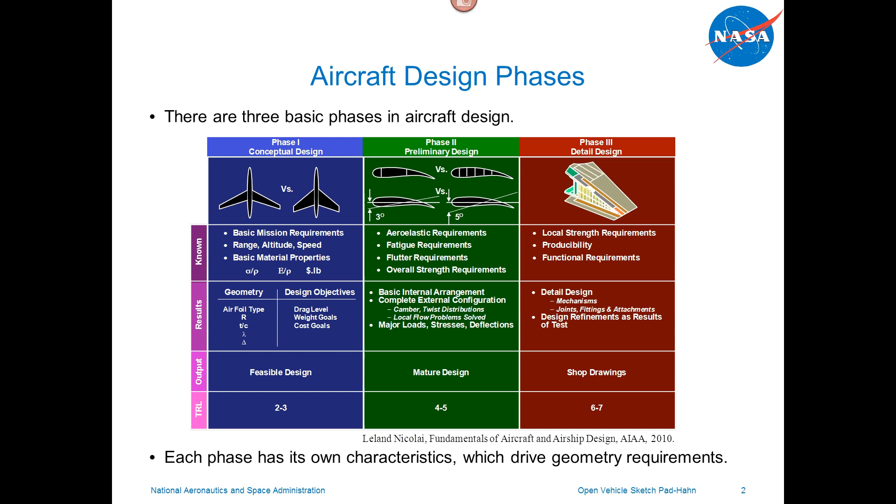But really, the whole mindset with this effort is we don't want to burden the front-end conceptual exploration with what the back end needs. They're very different needs between the front and back end, and I'll describe this with an analogy—sculpting. Imagine if you had this big block of marble and you got out your finest pick to start working. It would take you forever to get down to your statue.

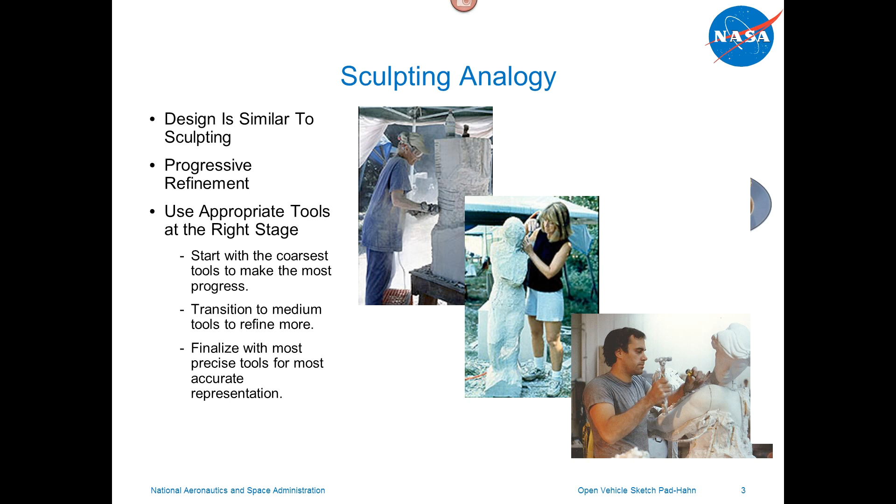So you start with a big sledgehammer and power saw, and you whack away the big pieces. Then you go to a slightly finer grade of chisel, but still taking away big chunks of that marble until you really got it honed in and you know what it basically has to be. Then you can use your really fine tools to pretty it up and finalize it. Design is exactly the same way—you want to use the right tool at the right time to do the right work.

So when we talk about geometry, you've got to realize our objective is to analyze these concepts—to figure out how well they're going to work compared to everything else that's out there. It's really important to understand that geometry is the core and starting place for all analysis. It's interesting—if you think about geometry, everything is an approximation of reality.

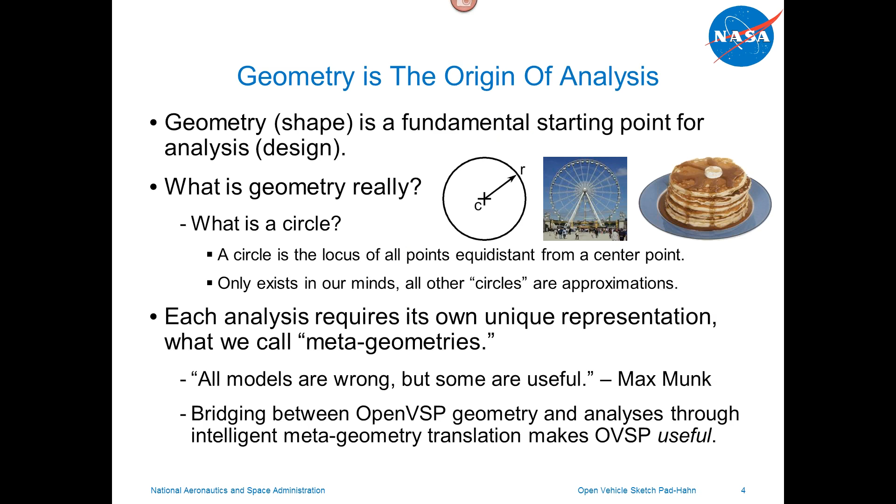If you look at those three different approximations of a circle, they're different approximations, for different purposes. That gets to a really important point when you start talking about geometric modeling: what you want for one analysis is not necessarily what you want for another analysis. So what we have is this common ability to create a three-dimensional shape and then export all sorts of different meta-geometries. Let me show you some examples of that.

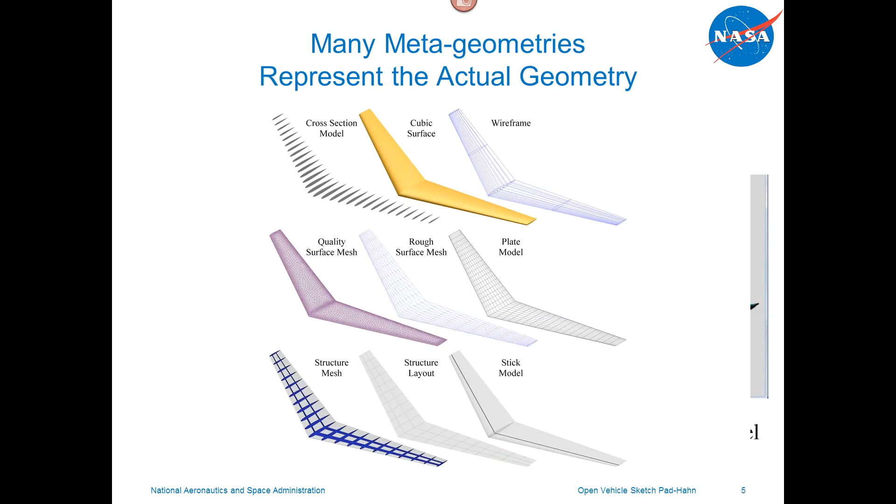For instance, when you're essentially rendering a 3D sketch of your vehicle, it's very useful to just look at it in a wireframe. If you're going to send that to a vortex lattice method, then you want a flat plate model. If you're going to export that to Star-CCM or any one of the other CFD codes—whatever your favorite code is—then you're going to want a quality surface mesh. If you're going to do finite element analysis, then you're going to want a structural mesh. So even though you have this common basic 3D model, this watertight model, you really want the capability to export many different versions of that geometry—different meta models that represent what you're trying to analyze. That's very important when it comes to VSP.

Rob at Cal Poly have been doing an incredible job over the last couple of years taking our initial parametric geometry core modeler and creating what they call degenerate geometry models. On the left-hand side you can see a three-dimensional model that you would create in OpenVSP—specifically a Cirrus SR22 that I modeled up. But when you want to analyze that in a rapid, flat-plate vortex lattice method, what you really want that analysis method to see is not that wireframe on the left, but the degenerate flat plate model on the right.

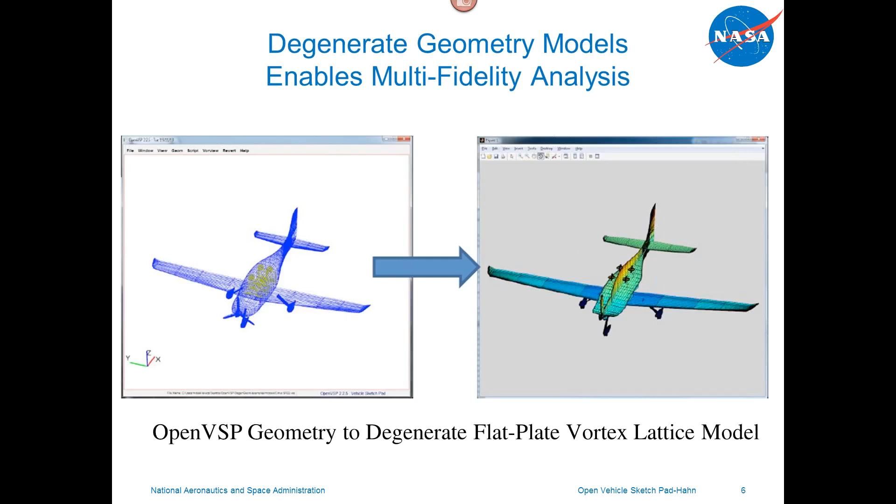They're very, very different geometry representations of the same core vehicle. This is a very important capability that Rob has been working really hard to implement in this latest version—not just a flat plate degenerate model, but all sorts of different degenerate models depending on where you're trying to send this geometry in terms of analysis. So again, getting back to this comparison of why you might choose to use OpenVSP.

I've been working at NASA for 30 years. When I first started working at NASA, we input all geometry as text.

You really had no idea what you were modeling, but you had different parametric inputs for span, chord, and you ran it through the analysis and hoped you got everything right, because you weren't even visualizing the geometry. As PCs became more powerful, there was a quick trend to go to computer-aided design.

That originated for manufacturing purposes, so it's incredibly good at being able to create a solid model of any shape. Well, the fact is, for conceptual design, we really don't need to create any shape. Basically, we need to be able to create round things and flat things and put them together in different combinations.

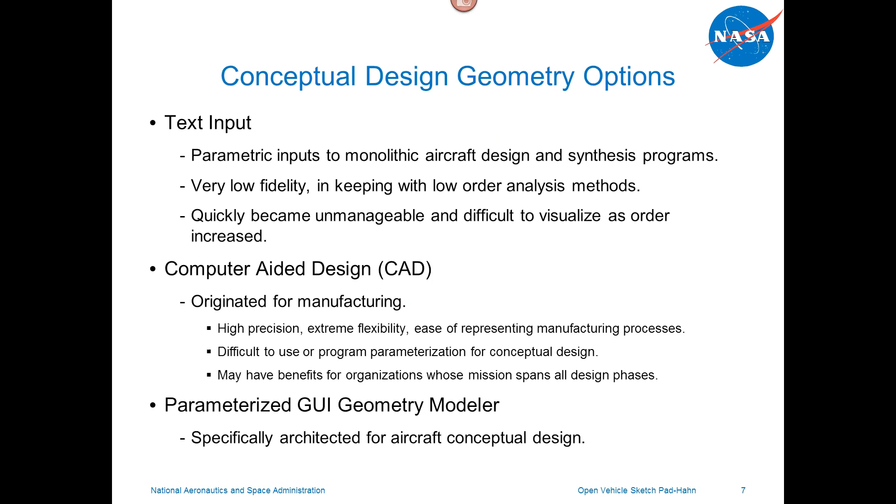So we wanted to find this sweet spot where we could give up some of the complexity that CAD inherently creates by being able to model anything, but instead have this ease of use and rapidity in putting together these 3D models parametrically the way that we used to do it in text, but be able to represent that geometry visually and see what we're getting. So I'm on slide 8 now, where you actually see what you'd see if you opened up OpenVSP.

This is a model of the Bell Eagle Eye, which is a UAV tilt rotor. You can see that we have it in wireframe mode, and you can see the internal packaging and the outer mold lines. In the geometry browser, just to the right of the visualization window, you can see that it's made up of all these different components.

Looking at the wing component, it's made up of essentially different parametric inputs. So instead of defining that wing as you would in CAD with a whole bunch of points or essentially extruding an airfoil shape, you just input the span, the tip chord, the root chord.

You can have different driver groups depending on whether you want to specify aspect ratio, taper ratio, and it's very, very easy, and you can create a wing in a few seconds. Even my high school student son finds it very easy to use and create three-dimensional models very, very rapidly.

So inherently with OpenVSP, we're trying to get away from the complexity and burden of CAD by being able to use parametric inputs to quickly create three-dimensional solid models.

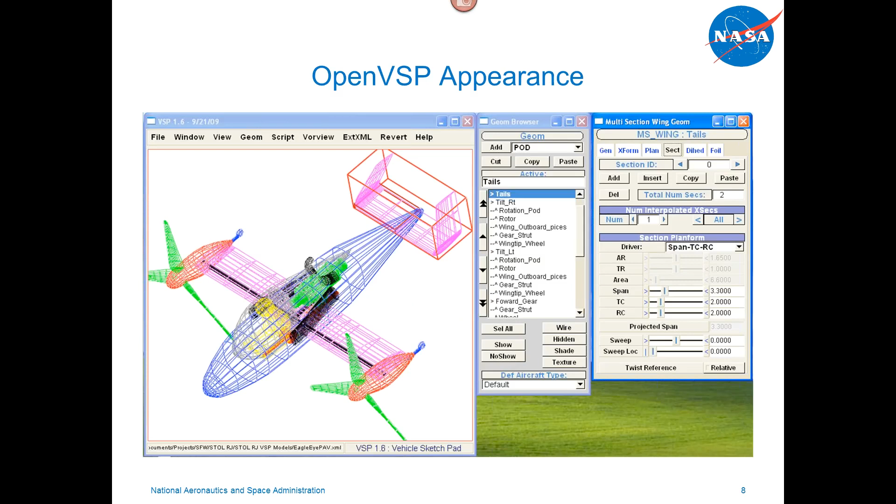So what are some of the attributes of OpenVSP? First of all, the core of it is that it's parametric. Everything is designed parametrically. That's really important when you start to understand what you're going to use that geometry for. In conceptual design, we don't know what the vehicle is supposed to look like.

So we want to investigate this design space parametrically. We want to do sensitivity studies, optimizations. And the way you do those sensitivities and optimizations is by defining different parameters that you're going to run different values on. You can't run a sensitivity off a cloud of points, which is what you have in CAD.

So OpenVSP is incredibly flexible. It's real-time interactive. It also has the capability to be batch operable so that you can do sweeps without using the interactive visualizer. It's also highly portable - we have it working on Windows, Mac, Unix, and several other operating systems.

It is a community, so very much we're trying to engage all the different users collaboratively. For instance, other users have created different versions of it that we don't even inherently support, because we don't use it at NASA.

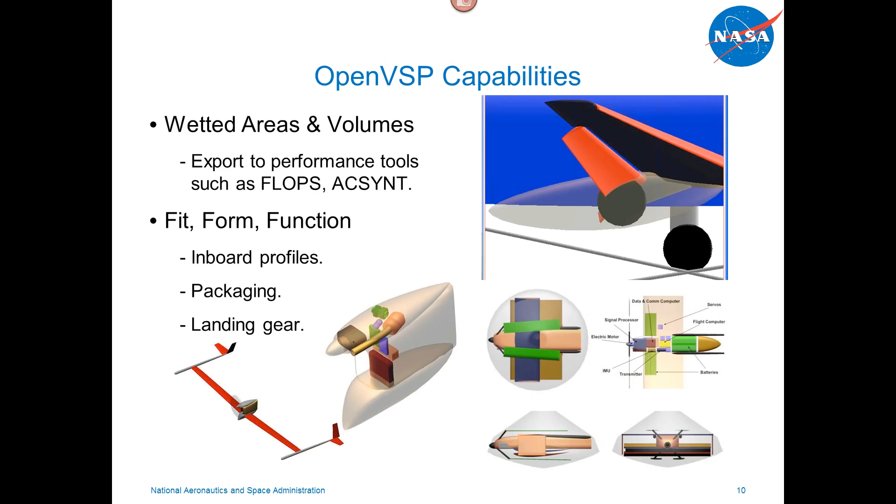So directly you can compute wetted areas and volumes from OpenVSP very, very accurately. Also, we have the ability to export stereolithography files, so we can directly create a wind tunnel model, a small wind tunnel model, or desktop models such as you see. All these vehicles were created from OpenVSP geometries.

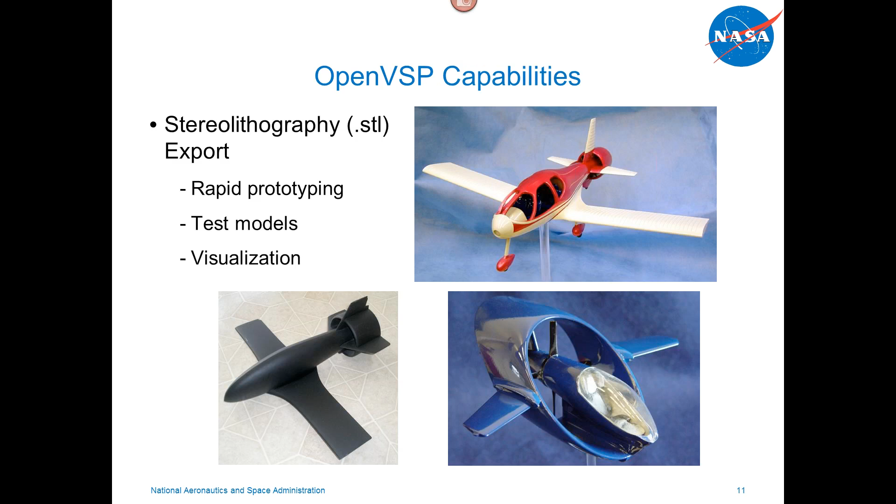Often we need to be able to create visualizations of our concepts in order to get them funded or to get people interested in them. All of these models you're seeing here were first created in OpenVSP and then exported through Rhino. Also, one of the neat things Rob has just done is create a STEP output, so we'll be able to directly transfer to other CAD and visualization programs through STEP, which we've only been able to do with Rhino 3DM files in the past.

Essentially, you're seeing one of the concepts that we created in VSP exported to Maya, and the animators then prettied it up and added rotating imagery.

I like to show as a representation one of the studies I did a couple years ago where we had to design a UAV that was going to be launched from an Ohio-class submarine. We literally modeled the Ohio-class submarine in OpenVSP, the capsule you see on the lower left, and the UAV on the lower right. It's a very adaptable geometry engine for creating even more than aircraft, and being able to quickly get to other programs that can help you visualize these concepts in a really pretty way.

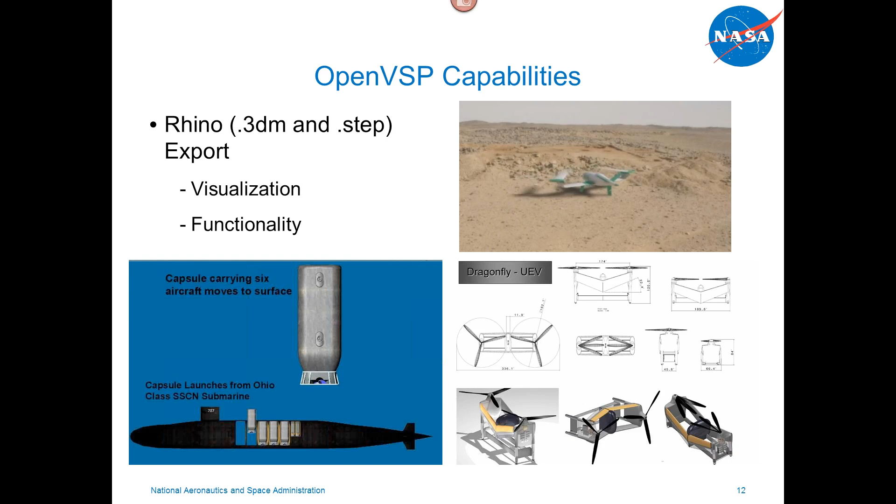OpenVSP is the starting point for, I believe, all your geometry needs in aircraft design. So here I'm showing not just the ability to get to pretty pictures, but being able to get to the core of what we want to do, and that is get to aero propulsive analyses. We've taken OpenVSP models to vortex lattice.

We're just spooling up a distributed vortex element effort through Georgia Tech, through panel methods such as CBAero, Euler methods such as CART3D, and full Navier-Stokes solutions. You're seeing some of those results from different concepts.

One of the really exciting things happening now is that Rob and NASA Ames are developing a brand new open vortex lattice code that also couples in actuator disks. If you look at that picture in the middle, that's the new VSP Aero, which in version 3 will be directly embedded in OpenVSP. The neat thing is you can capture, with a really fast and easy to get to aero propulsive analysis, even the propeller swirl effects.

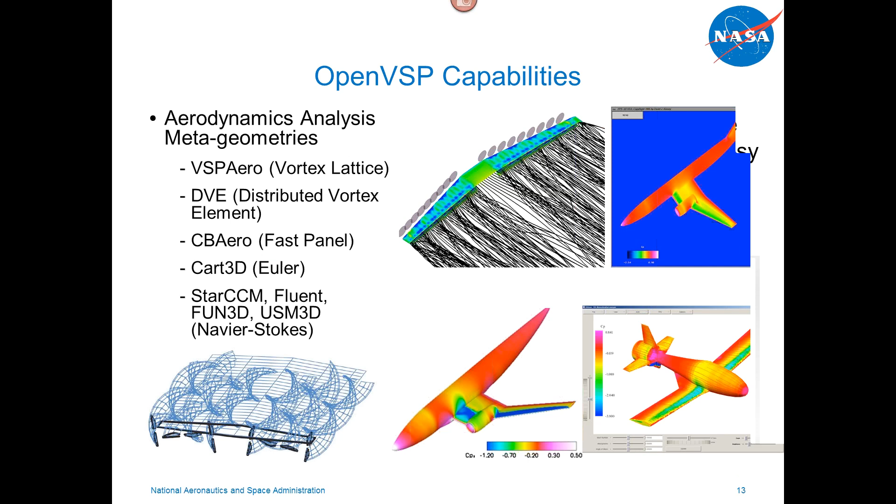I'll say a little bit more about the new VSP Aero. Vortex lattice is neat because it's a really fast method you can embed in your optimization loop and run hundreds or thousands of cases as you vary span, aspect ratio, and other wing parameters. But now you can also vary the propulsion characteristics and do things we're investigating, like having all these little propellers distributed across the entire leading edge of the wing, and see the different swirl effects taking place, changing the span-wise load distribution you're seeing on the lower right.

It's really exciting that we're able to get to much better analyses much earlier on in the conceptual analysis, and that's the whole power and beauty of OpenVSP.

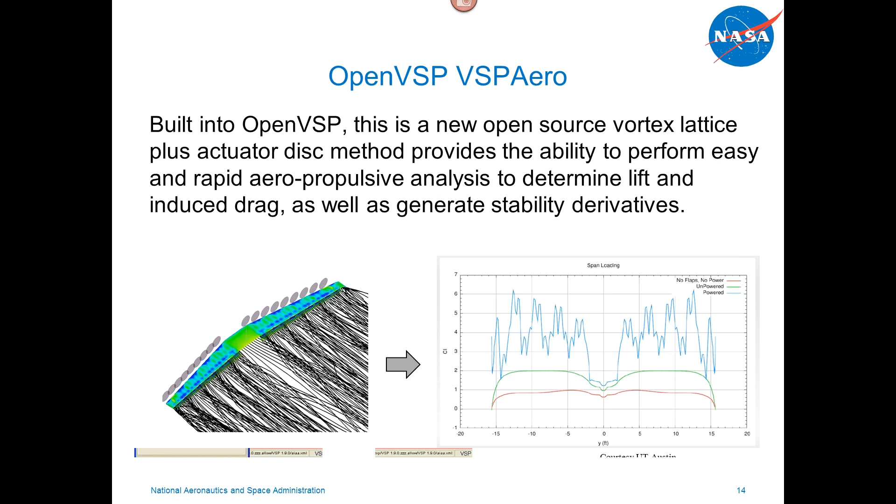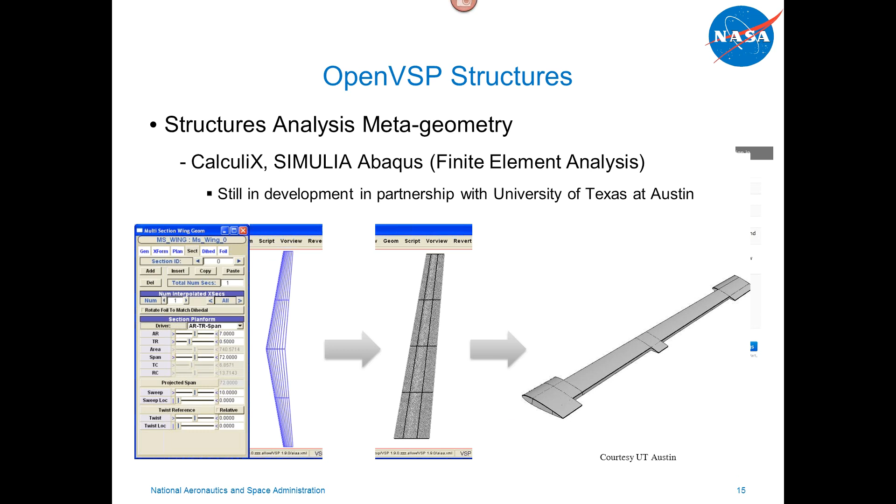Another thing we're just starting to spool up through the University of Texas at Austin, through a professor, Armand Chaput, is the ability to analyze the structure. He's taken a degenerate version of our OpenVSP model and is able to model up the wing box, then directly take that to CalculiX and do a finite element analysis. So really exciting that we're now able to get to wing structural analysis very quickly and easily, in addition to aerodynamic analysis.

If you go to the OpenVSP website, which I invite you to do, you'll see on the left that's the opening page. One of the neat things included with the OpenVSP website is on the right, and that is a Hangar. Right now there are about 150 different models, and we invite all the different users in the community to upload and download models from this central repository.

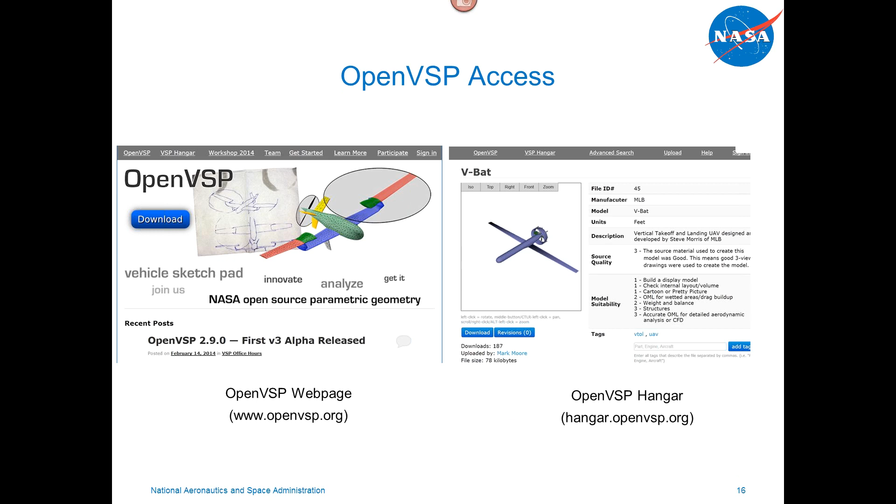Some of the models are really good, and some are done by students who don't know what they're doing, so they're pretty pathetic. That's the beauty and power of a community, right? You get what you get. One of the neat things Rob implemented is the ability to rate the models, so the person who put it together can say whether it's a quick and dirty model or something they put a lot of effort into. It can help guide you as you look at the different models.

Just closing up, because I want to get to actually showing what OpenVSP is and can do. I wanted to share that we track the statistics of its use, and already we're at over 50,000 downloads. So this is very much getting out there.

One of the wonderful opportunities Rob provides every year is for us to get together as a user community at Cal Poly San Luis Obispo in California in the summer. It's a beautiful place and a perfect time of year to go. I invite anyone interested in learning more to come. You could arrive on the first day never having used OpenVSP, and by the end of 2.5 days come out as an absolute power user. There's a nominal fee of about $150, which just covers food and beverages. It's a really fun experience, and I hope you'll consider coming.

In conclusion, I've tried to show you that OpenVSP was specifically created as a purpose-built conceptual geometry modeler for parametric conceptual design. It is very easy to use. I have high school kids use it all the time without difficulty, and I give it to my summer students, who within a day or two are making beautiful models. It's not like CAD, where you can spend 3 months and still barely be a beginner. It's very flexible, real-time interactive, batch operable, and portable across many operating systems. We use it exclusively as our geometry tool in conceptual design, and even take it into stages of very detailed aeropropulsive design with FUN3D and other capable CFD tools.

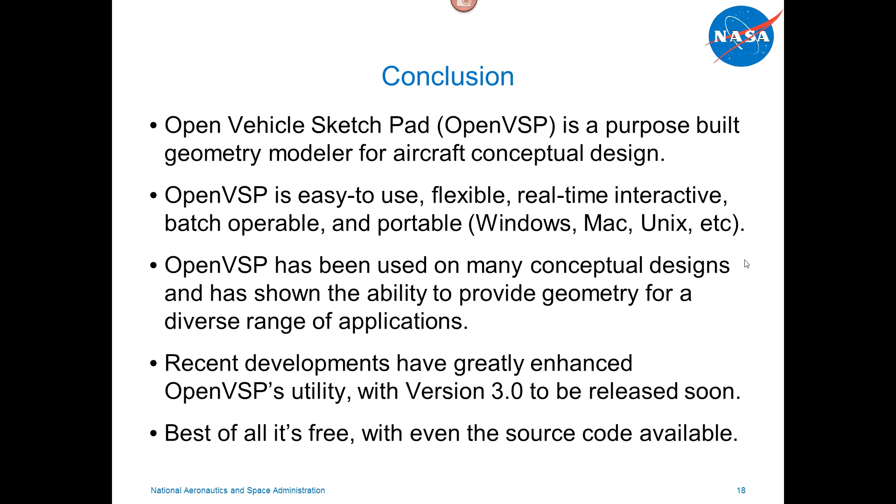So I'm going to jump out of this, and while I get into OpenVSP, I'm going to see if Rob's mic is working and if he wants to make a few comments.

Can you guys hear me now? Yeah. Hey Rob. Okay, well I'm not sure what all to say since Mark did a good job of pretty much covering things. Just a little background on myself: I'm on the faculty at Cal Poly in San Luis Obispo, and I've been working this problem of geometry for conceptual design for the last dozen years or so, one way or the other, working closely with NASA throughout that process. Like I said, Mark covered it pretty well. I'll just be here for any questions or anything else that pops up.

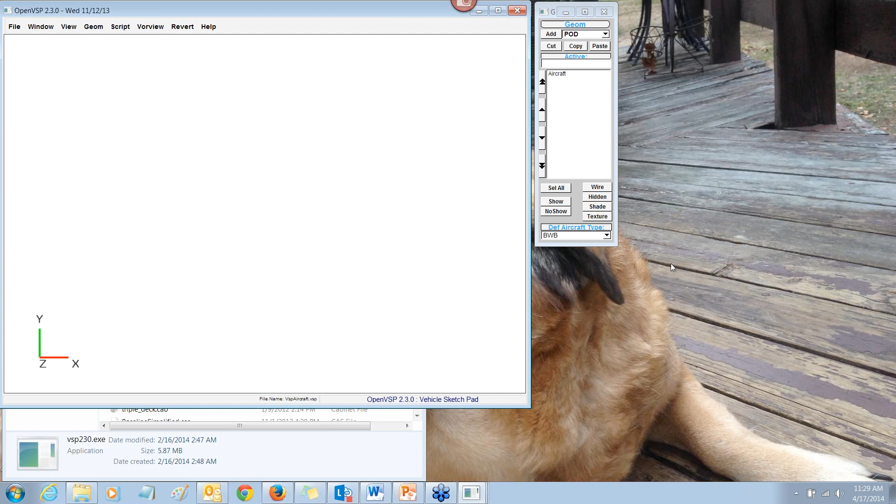Okay, so you just saw me double-click on OpenVSP on my Windows laptop, and this is what comes up. Essentially, it's a very simple browser.

So I think we're 30 minutes into this. How long should I go, Aaliyah? I can speak - you guys should go till you're done. Okay, yes, thank you. In finite terms, the goal is to be wrapping up at the top of the hour. Okay, so I guess it'll be the bottom of the hour. One of the things we wanted to make sure we do is leave some room for questions. But maybe Mike, as questions come in within the next 5 minutes, we could start asking Rob and Mark the questions from the teams.

Sure, yeah I can. So I'll spend about 10 or 15 minutes then quickly showing what OpenVSP can do. Essentially you see across the top the different main commands: File, where you can create a new file, open an existing one, save, import, export. I'll show some of those capabilities.

Let's just go ahead and jump in and open something that I'm working on right now, which is a crazy distributed electric propulsion design.

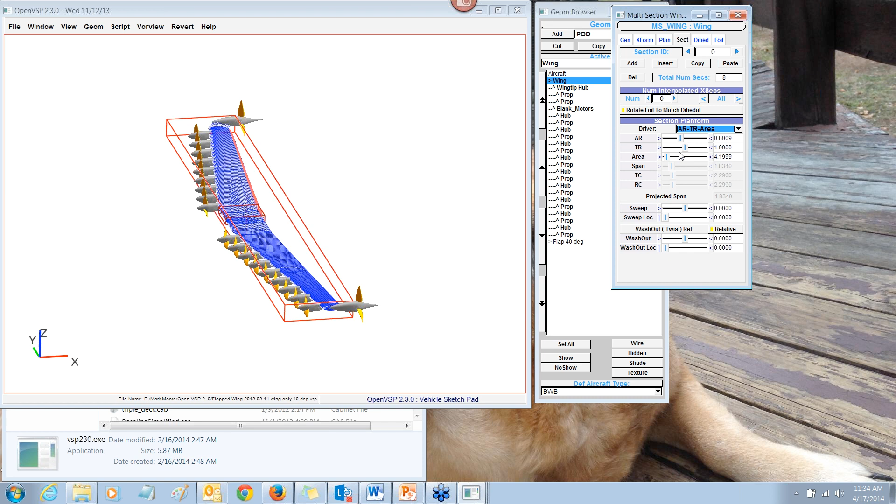Let's go ahead and change the characteristics. I'm running out of screen space because I've got these other things here, but you can see the general characteristics of the wing include what type of material it's made out of. I can make it translucent, see-through, golden glass, or whatever color I want.

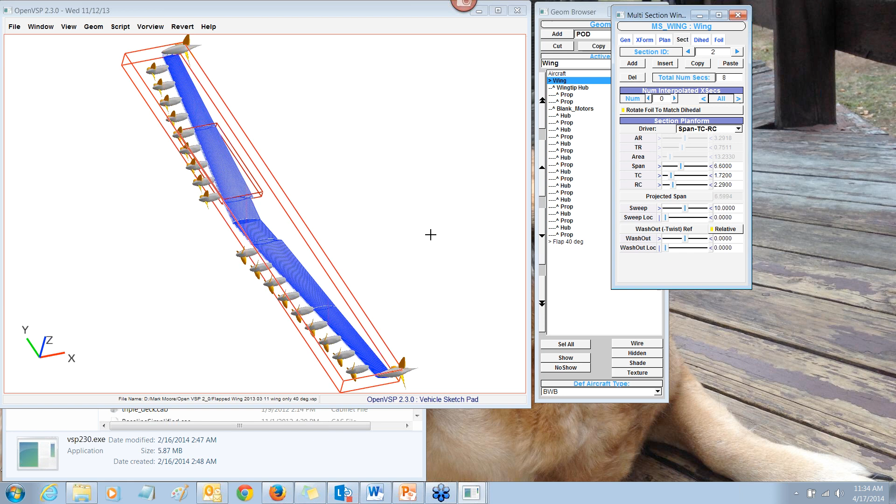This is attaching to the parent and the children. If I go back to wireframe, I can change the tessellation, make it more coarse or less coarse. In terms of where it's located or what the rotation angle is, I can control that here, and you can control the symmetry here. So really basic things, and it's well laid out.

Let me get into the section characteristics. This is called a multi-section wing component, and there are essentially a few different component types that we tend to use over and over. With this component, it's defined by these parameters: aspect ratio, taper ratio, wing area, span, tip chord, root chord. You'll notice three of the six are able to be changed, and the others can't be changed because they're moving automatically.

That's what we call a driver group. So sometimes you may want to define the wing with the span, the tip chord, and the root chord. Other times you may want to define it by the aspect ratio, taper ratio, and area. Essentially it gives you the ability to define it with different parameters, whichever you choose. You can quickly change the sweep depending on which section you're working on.

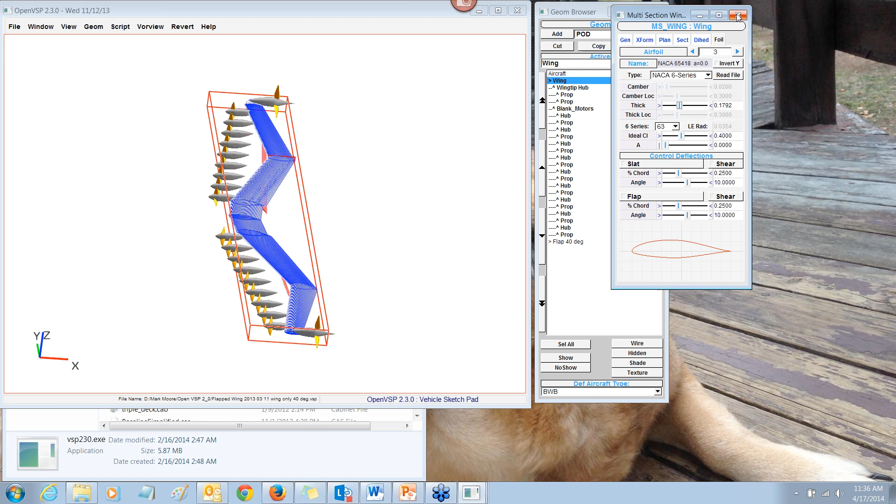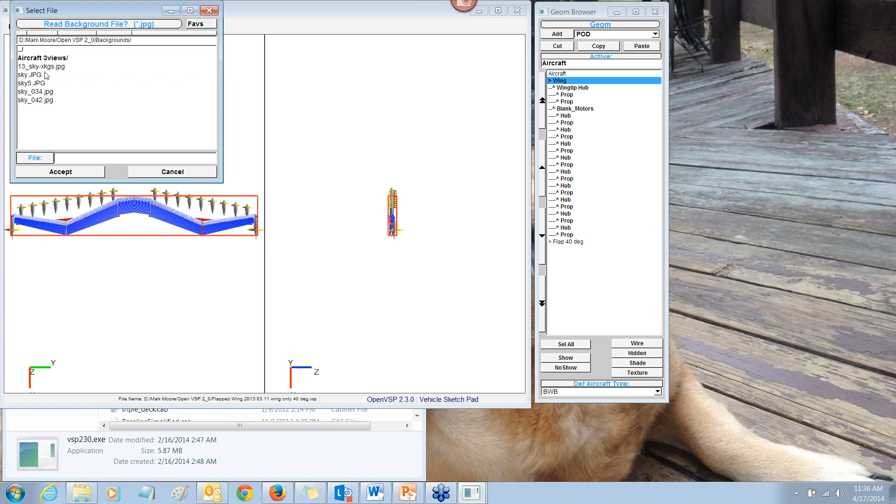Here's the section ID. Right now I'm working on this section that's boxed in. If I change to the next section, you can see now that this section is boxed in, and if I change that sweep... sorry, it's that little section. There, now I'm working on this section here. So if I change that sweep, it's just a simple parameter change.

If I go to the next section, this is what I meant by multi-section wing—it's made up of 4 different sections. I can now change this sweep, I can go to a negative sweep. Very quickly and easily, you can fundamentally change the parameters that are defining the wing.

I can change the dihedral, and I can read in any airfoil. There's also built into OpenVSP, for instance, 6 series, biconvex, all the NACA 4 series. If you do that, essentially all you have to do is specify—actually I'll go to the 6 series so you can see.

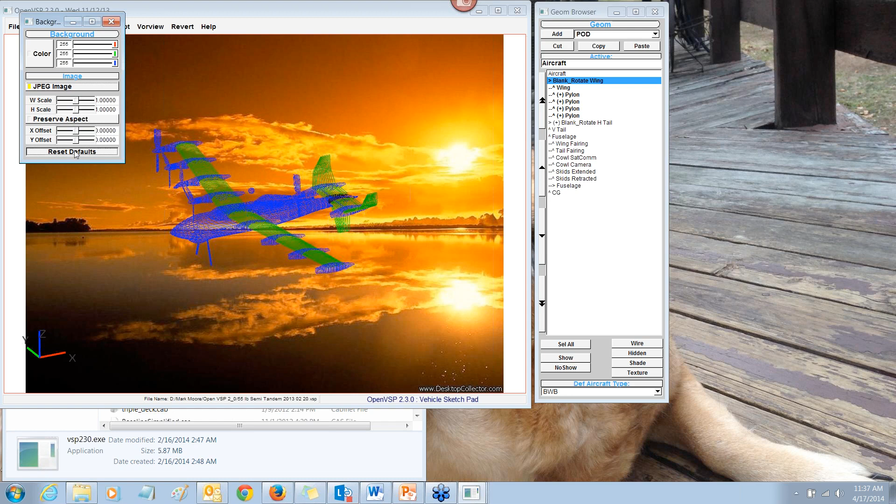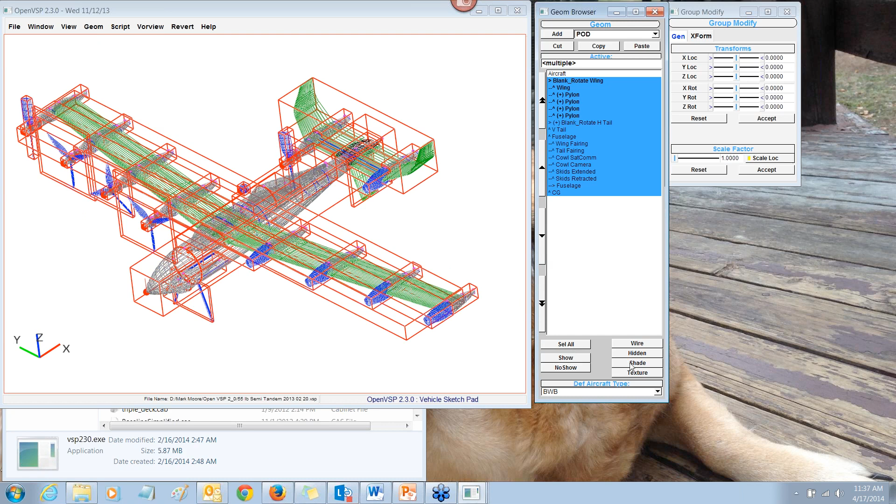Then all of these become able to change. I just specify the ideal CL, the 6 series type, and the thickness, and very easily I can change all the characteristics associated with this wing. Also, I can just read in an arbitrary airfoil file from your favorite place, such as the University of Illinois. So this gives you a basic idea of what you can do with it.

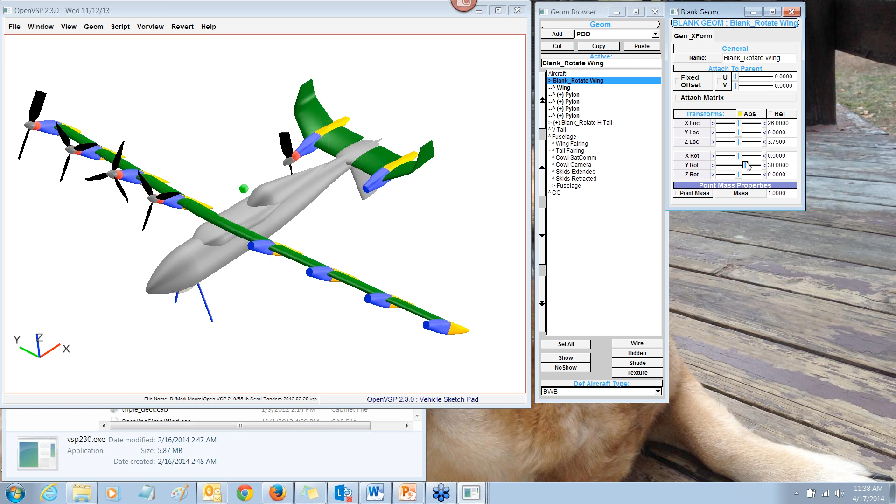Again, with the viewer, I can have one window, I can have 4 different views, or 2 different views—there's just a lot of different choices. I can throw in a background; for instance, let's put in a pretty sky picture.

Just very, very easy. Actually, let me go back and bring in the background again. So it's very quick and easy to create 3D models and even do a rapid rendering.

Let me jump into a different model. Since pretty much everyone here is interested in UAVs, let's jump into this one. This is a UAV—let me get rid of that distracting background—this is actually a UAV that we've just built at the 55-pound scale as a small UAS system.

Again, let me select all the components and shade them so you can have a look. It's made up of all these different components. If I click on one, you can see it outlined.

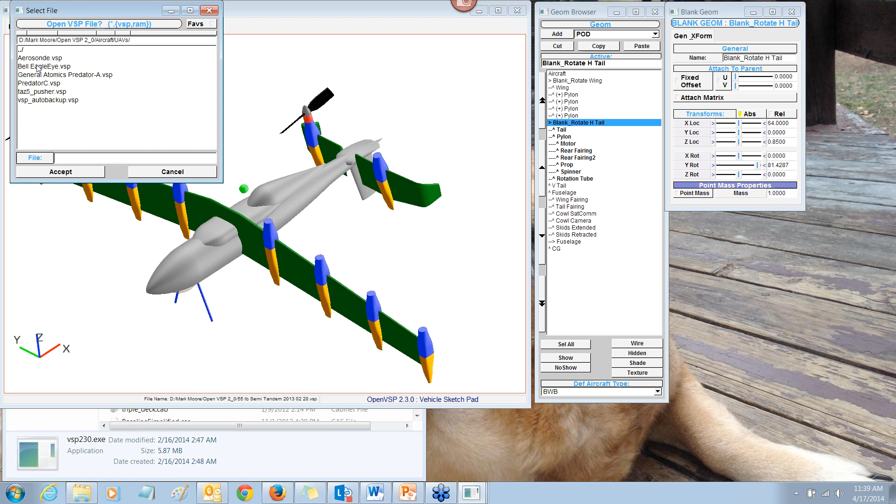This specific UAV is designed as a vertical takeoff and landing aircraft. You can see it has a pivoting wing, which again you're able to model up in VSP to test the articulation, with all those components as children of this main parent, which is the pivot.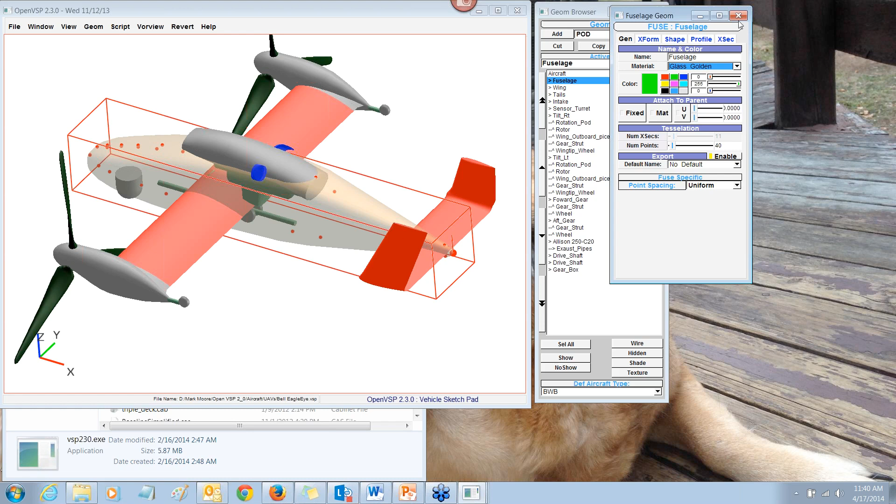Also, the tail pivots and provides a really robust vertical takeoff and landing control capability, which we're actually flight testing now. So we did all the design of this starting from OpenVSP, exported to tools such as STAR-CCM+ to do the aeropropulsive CFD, directly exported this to ProE, and then our CAD guys used that to create even more refined models, which went directly to the fabrication of this vehicle.

So Rob, do you want to jump in and make any comments that I probably missed? I think you're doing a pretty good job of walking through it, Mark. I think it might be a good time to see if anybody has any questions. There are a couple questions, if you wanted.

The first question asked: in the realm of simulation, are there any plans to do sound analysis? Acoustic analysis.

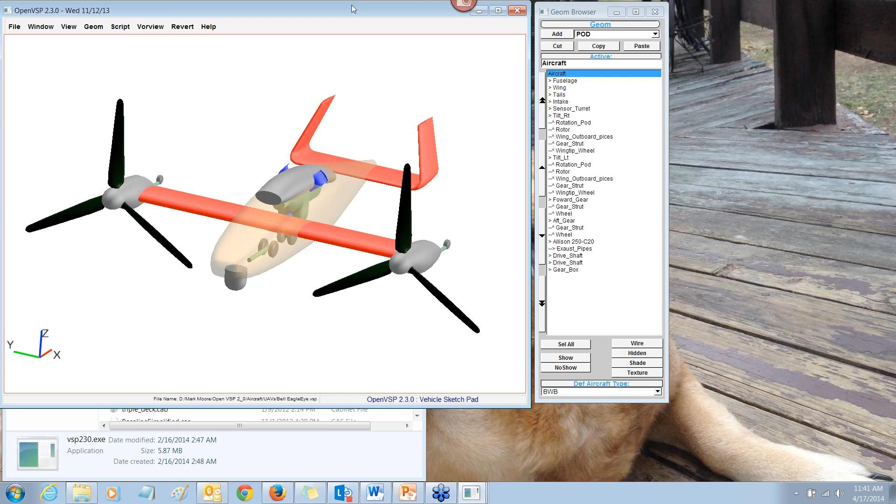By and large, the VSP philosophy is that we aren't experts in acoustics. We aren't experts in all the different tools for things like the aerodynamics or the propulsive analysis, and so we generally try not to build those tools into VSP. Instead, what we try to do is build connections that can feed those tools that the experts are already developing.

So depending on what phase of the acoustics process you're in, for example if you're trying to look directly at the aerodynamic noise generation using a CFD tool, then yes, VSP can already feed a large number of CFD tools, and you could use that process to calculate the aerodynamic noise of the configuration. On the other hand, if you're using a higher level tool like ANOPP, which models noise sources and shielding, there isn't any current connection that I know of, but the degenerate geometry capability we're introducing would be a good one to then connect and feed ANOPP so it could do its shielding analysis of a high level concept. So I hope that answers the question.

You showed a moment ago some of the airflow between some of the propellers. Was that generated within OpenVSP, or was that through a third-party program? Right now the calculations of the aerodynamics are done with third-party programs, but that line is going to be blurred a little bit in the future.

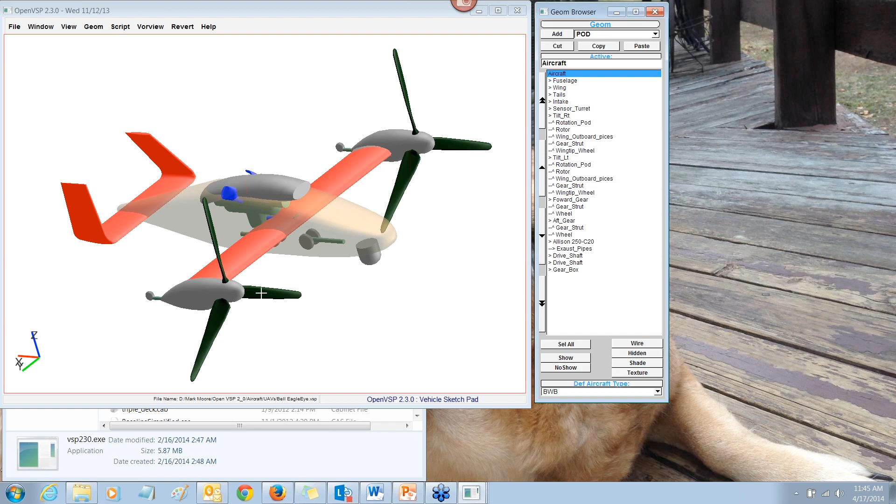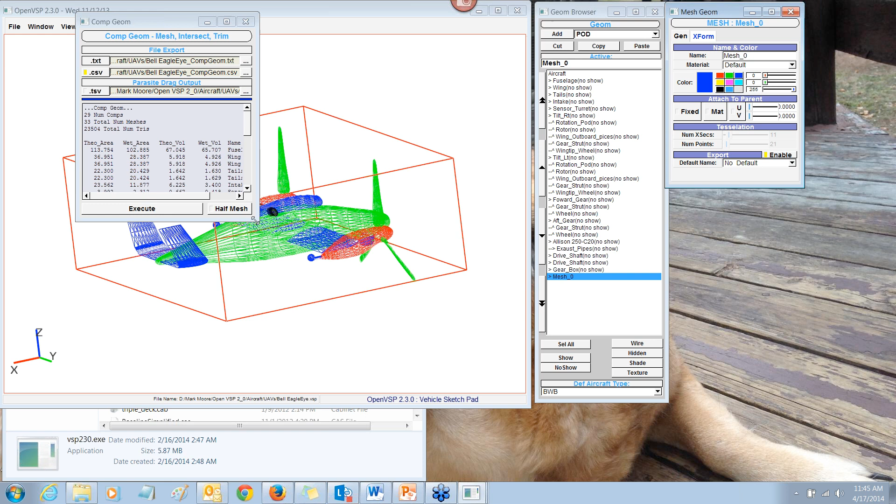So you're getting into a really unique characteristic of distributed electric propulsion — being very adaptable to these strange missions where you need the vehicle to do more than one thing well. It has to be able to do several things well that are diametrically opposed requirements. Thank you.

I guess we'll go back to the question about the program itself. Is there a way to import airfoil coordinates of a particular airfoil via a DAT file into OpenVSP?

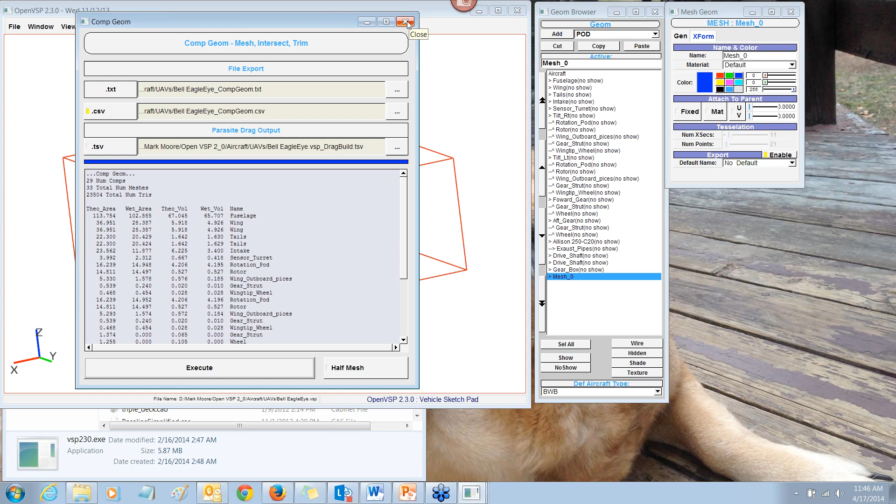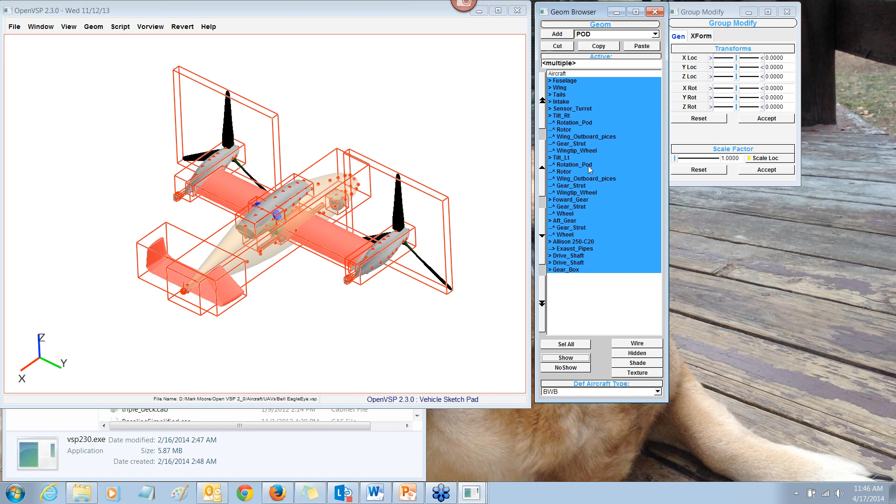Absolutely. We currently support three or four airfoil file formats. We have our own format, but we also support both of the file formats from the UIUC, the University of Illinois Urbana-Champaign, airfoil database. Those files appear in two formats, a Selig format and a Lednicer format, and we support both of those.

I love that. Let's see here, Edward. See if I can pull that up. Well, while you're jumping to another question, let me just show a quick capability. Usually, well, here, I'll just go ahead and jump to it.

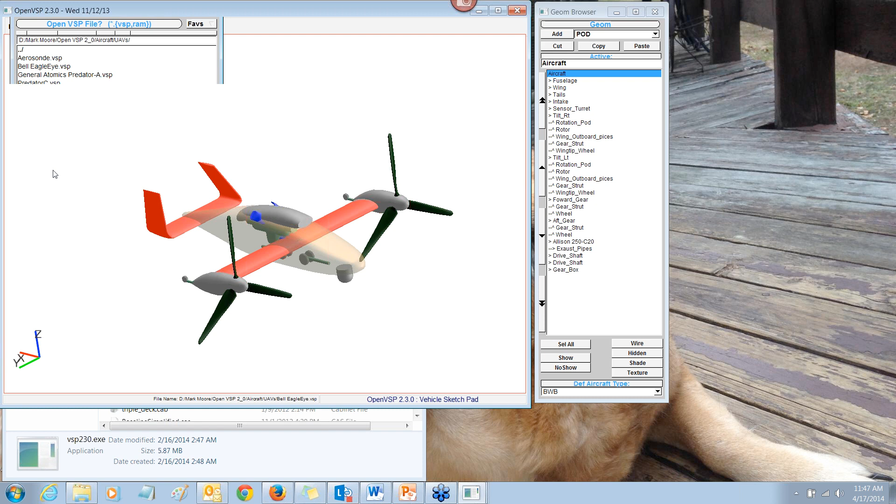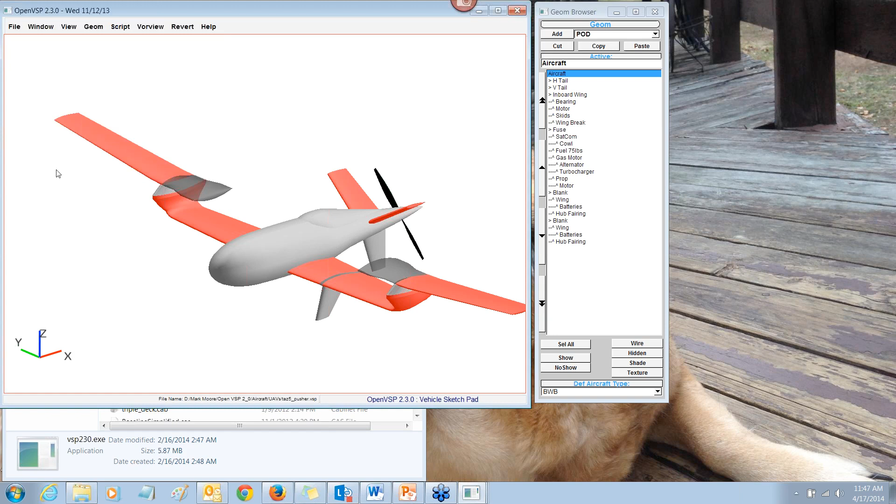One of the neat and powerful features is you can create 3D solid geometry with internal components, and then in VSP you can go in and calculate the wetted areas. It figures out what's on the inside versus outside, and trims the components that are on the inside, so you get the theoretical volume and true wetted area and volume buildup for all the components and totals. This can then feed into your parametric parasite drag analysis. So very easily you can see how I just computed the wetted area and volume of this vehicle, which was quite complex with a bunch of internal components.

Let me give you another question. Edward writes that he's excited VSP is going to get aerodynamic analysis capability, like what you just showed. Can you discuss if it will be able to accurately model unconventional multi-surface configurations? The example he gives is joined wings and C-wings.

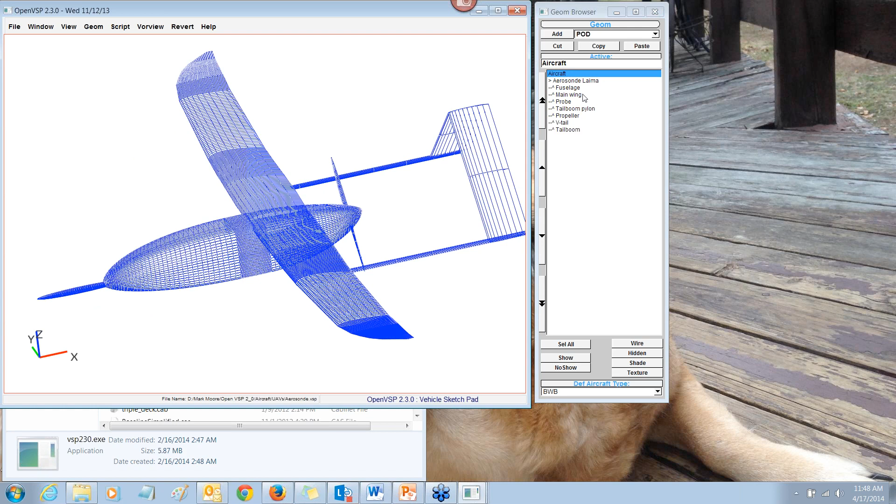The VSP Aero program should have no problem with those kinds of things. It's based on vortex lattice theory, meaning it represents lifting surfaces as thin surfaces. It will have both a subsonic version with a parametric correction, but also linearized supersonic flow. So it won't do high angle of attack separated flow, and it won't do transonic flow. We're still trying to figure out how good its modeling will be when you model a thick body like a fuselage. But in terms of modeling wing-like shapes in arbitrary configurations, it'll do a fine job within the limits of vortex lattice theory.

Next question. Ron's asking, do you plan on adding power distribution in VSP to enable examination of electric aircraft parameters?

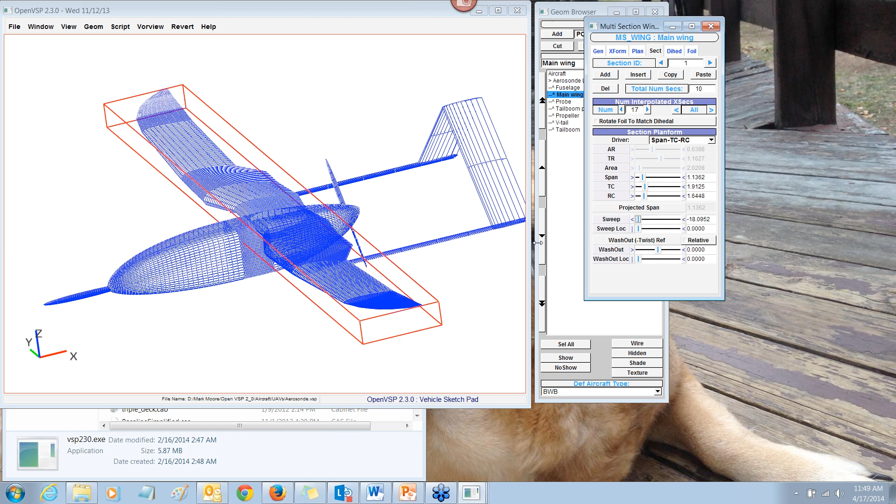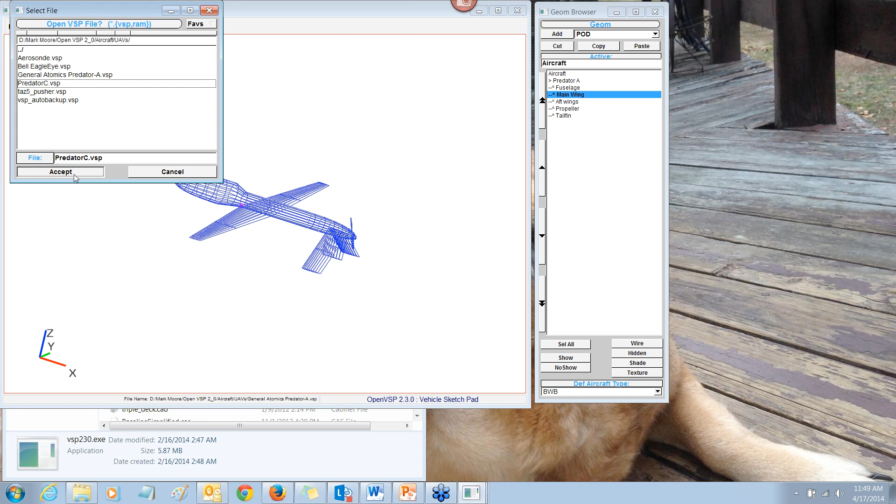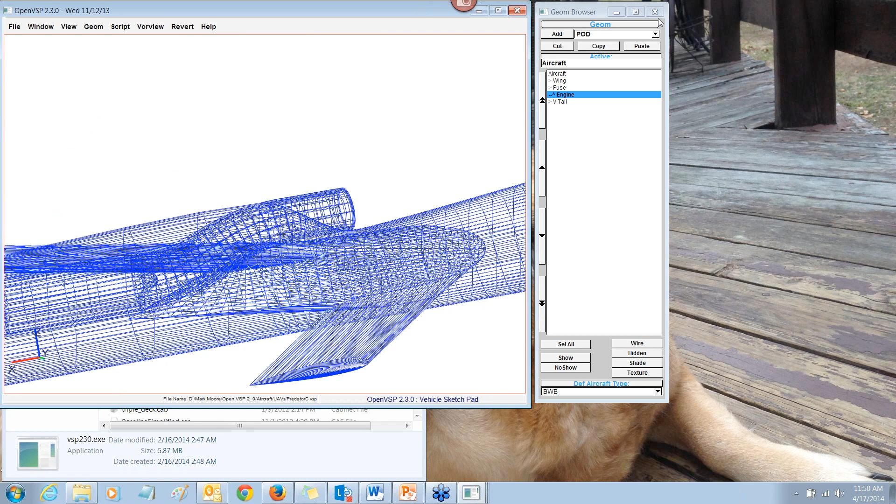I'm not sure what you would have in mind. VSP is really at its core a geometry tool, and right now we have no plans to add things like the calculation of power required for flight or climb, or power required for various payloads, or a power distribution system where your batteries would go and what kind of power bus you would have and how that power would get used. We see that as a different realm. On the other hand, many of the aircraft Mark has shown are inherently electric aircraft and use the flexibility of electric transmission to distribute the generation of thrust all around the vehicle, which is a new degree of freedom and a great innovation in aircraft design. So in that sense, yes, you can do electric concepts that are unconventional, but modeling the volts and amps isn't really a geometry problem.

Sure, I think, yeah, Ron, let us know. I think he was hinting at the power versus distance thing, but clarify if that's not what you meant. I think that answered the question.

Edward has a follow-up question. Will the new Aero code be able to calculate wave drag if you put area ruling into the model?

VSP Aero itself doesn't have this, but we already have the ability to do the kind of slicing like a Harris wave drag code, like A-Wave, and I have code to do the Eminton-Lord calculation to turn that area distribution into a drag calculation. I just haven't had time to incorporate that yet, so we have some pending contracts where that might get done in the next year or two, and since it's open source, that would be an interesting thing to do. I expect that in the next year or two we will have a linearized wave drag calculation built into VSP.

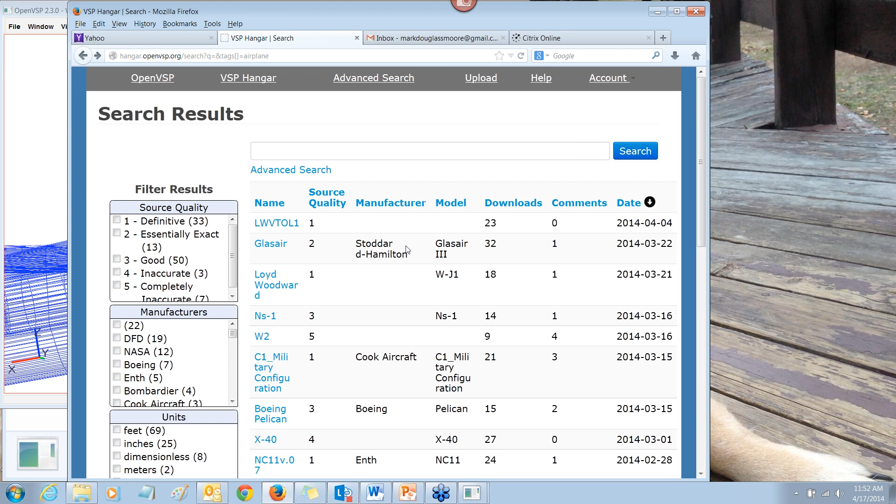I see one of the growth areas for our user base and its application is to be an easier way to model things for 3D printing. One of the bottlenecks to home 3D printing right now is that CAD is such a pain. If you want to create your own model, you have to deal with very difficult tools that are expensive and have a steep learning curve. On the other hand, VSP can feed 3D printing very easily and directly, letting you quickly and creatively create just about anything you want.

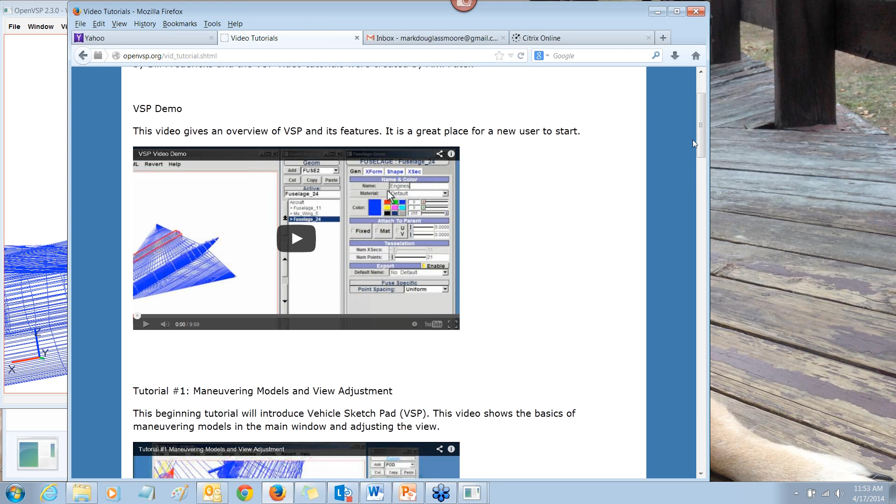Okay, I've got a couple questions around how to get started. I see there's actually a Get Started and a Learn More tab. Could you point to where the tutorials specifically around fuselage and then maybe airfoil design would be, some of the best tutorials there to steer people towards?

So I just opened up a browser and I'm on the openvsp.org website. This is what you'll see. You can download it just by clicking that button. You can jump to the VSP Hangar here, and you can see a model that a student just loaded up of a car. Why he's modeling that car, I don't know.

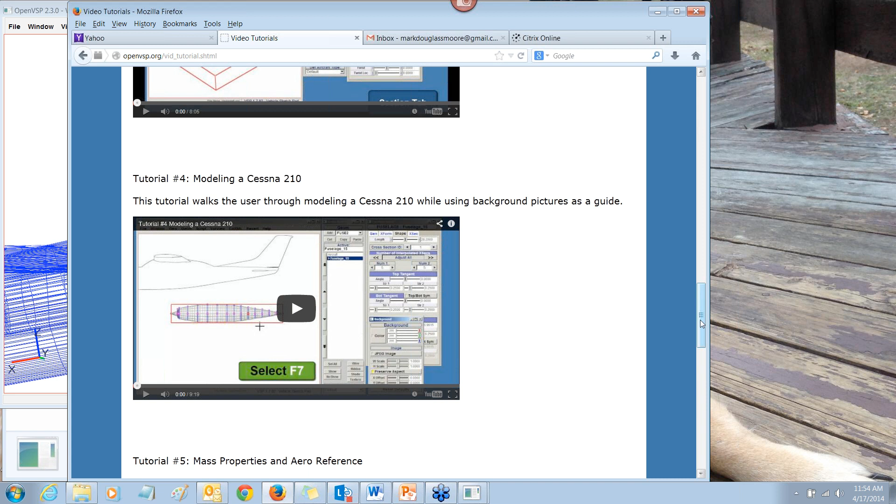But everything's there, let's see what somebody modeled up, the Boeing Pelican. You never know what you're going to find. We've got people who model things from science fiction movies and put them up, and all kinds of things. Some people just play with it and do their first experiment and upload it. It's a little bit of the wild west of 3D models, but the beauty is in the journey.

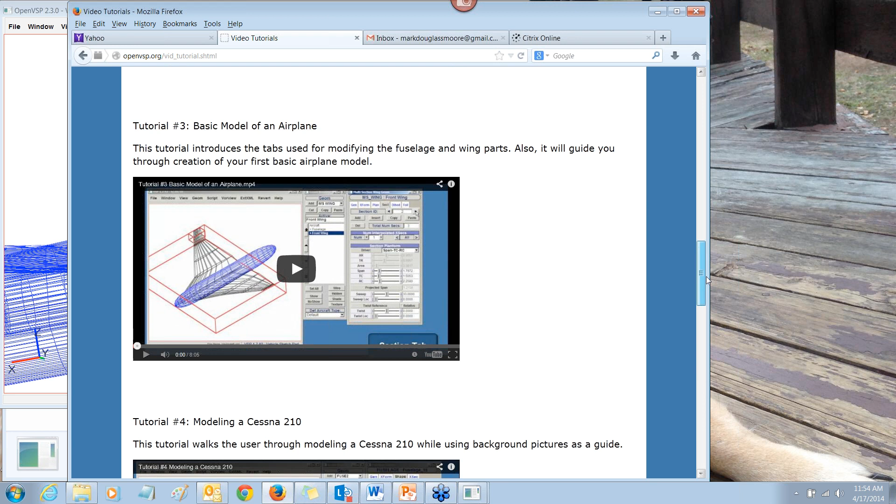One of the neat things is in the Hangar browser itself, you can rotate and see what you're going to get without having to download it and open it. So right off the bat, you can get a pretty good idea of what you're going to get. So that's the Hangar.

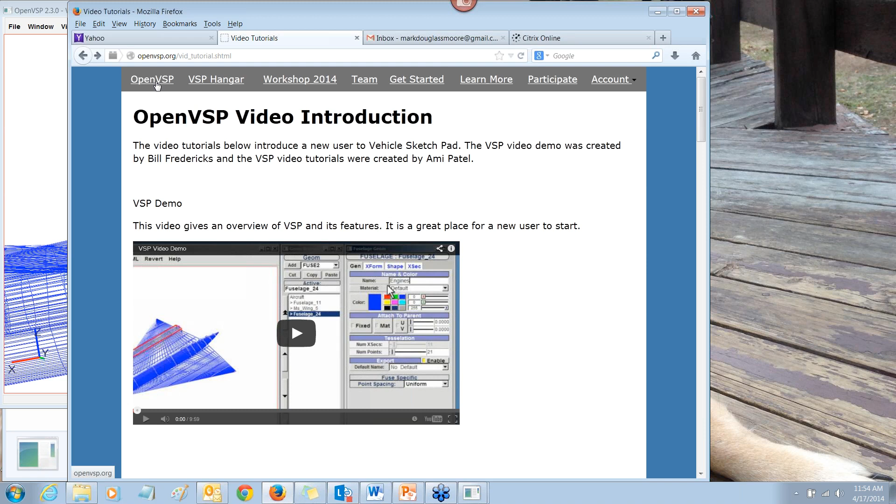One of the best places to get started is by clicking on Get Started, an excellent place. There you can download and install, or jump into the tutorial videos. By watching these six or so videos, pretty much you will know what you're doing after an hour.

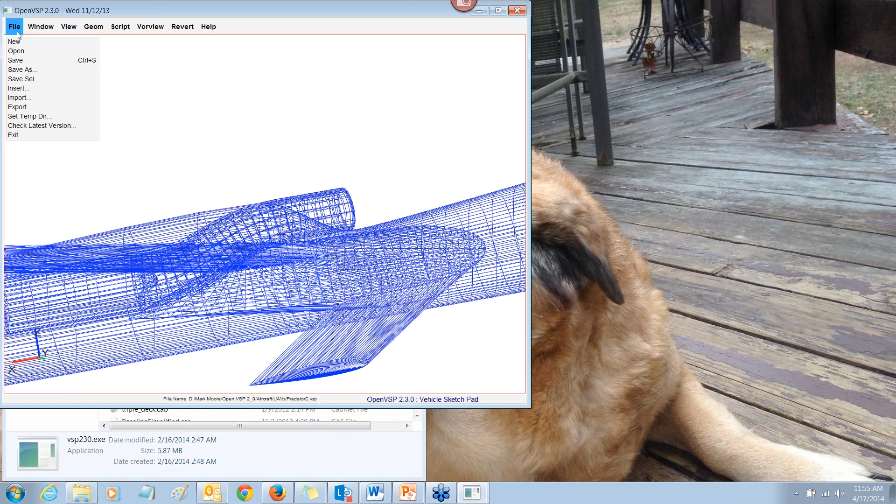Essentially the first one walks you through all the different menu items, how to modify the view, adding and modifying parts, a basic model of an airplane, and then specifically a Cessna being built up from there. So there's your airfoil, and you add your fuselage, essentially, yeah, that looks like a good one.

One of the neat things about that background is you can actually throw a three-view into the background and build your 3D model right on top of it. So it's really a very effective sketch pad.

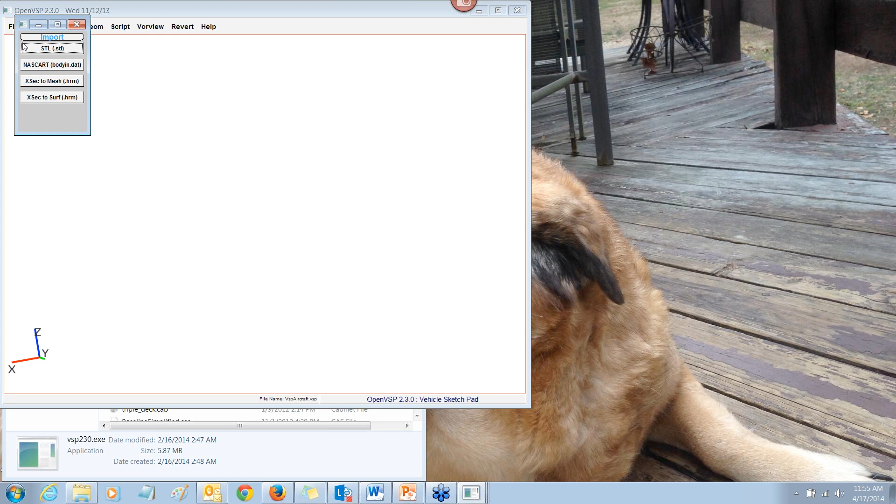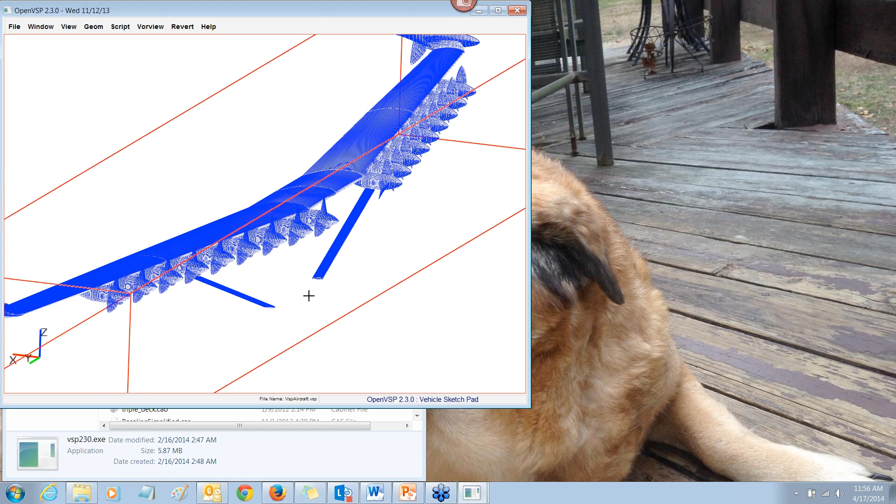And then there's also getting into features such as the mass properties and the aero reference, and even the older VorView or Vortex Lattice method, which we're replacing with VSP Aero because we weren't allowed to distribute VorLax, and we will have the rights to distribute the new VSP Aero. So these tutorials really will get you up to speed, able to learn how to modify a fuselage, wing component, and do it all very easily.

Okay, also there's a link to more information on the workshop. This is the third one that will be held, so again, I invite you to participate through that.

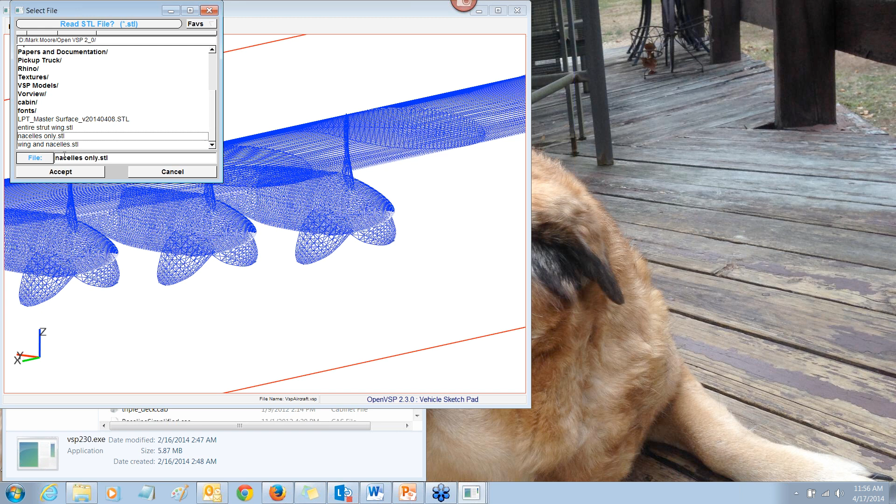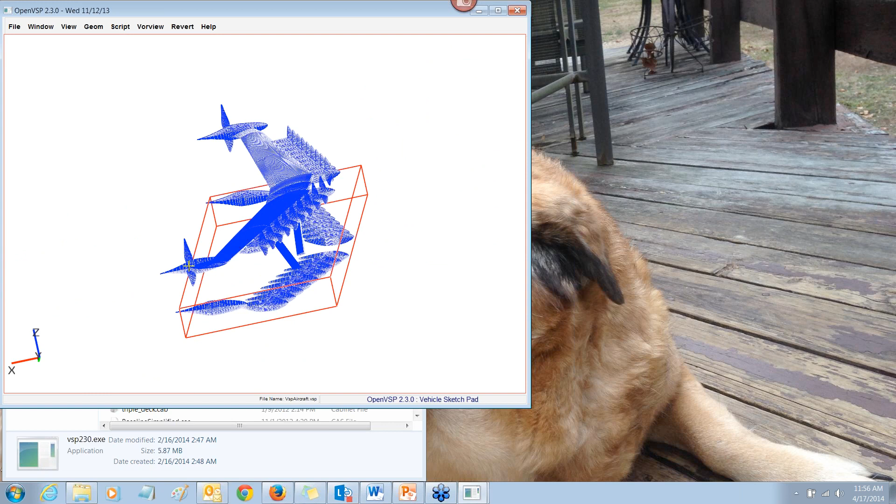There's a question from Kavi asking, is it possible to import CAD geometry? So Maya, CATIA, SolidWorks, Fusion - can you get 3D geometry into this program and use that?

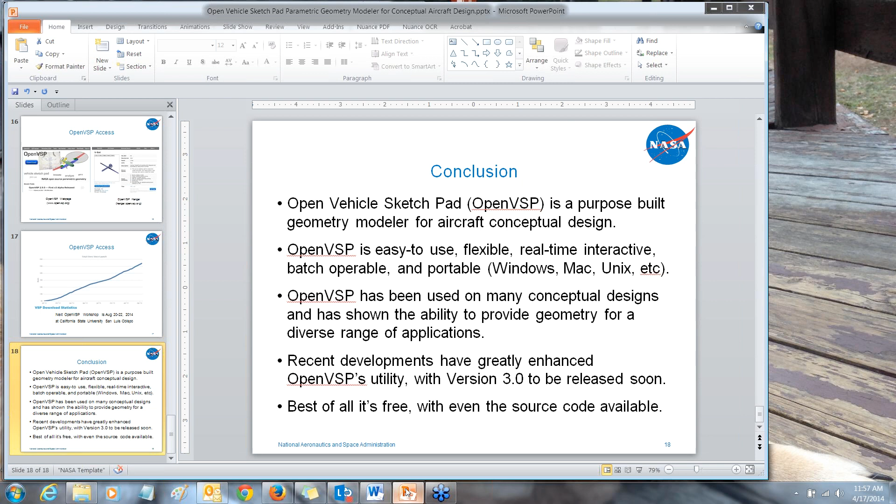Yep, that import just brings in the triangles themselves, and you can move it around and rotate it, but you can't do - it's not obviously parametric. Yeah, that's via STL too.

But the new version 3 has a pretty, I hope, profound capability where you can read in an STL file, and then through an interactive process, iterative human in the loop, you can do a least squares fit of VSP components to that model.

You can take a legacy file, whether it comes from CAD, from a laser scan of a model, or came out of somebody else's CFD analysis. You'll be able to pull that in and come up with the best approximation of a VSP model in parametric form that you can then use as a starting place for your design study.

So you can take the airplane your company's already built, make a VSP model of it, and then look at doing a wing change or a fuselage stretch or something like that.

Okay, cool. Yeah, that's very useful. Man, I wish with this question - there were like three different questions that just popped up on that, all in the final 3 minutes. That's a shame. So if they wanted to do more, are you guys fine if they reached out to your emails? Are you guys available that way? What's the best way to ask questions?